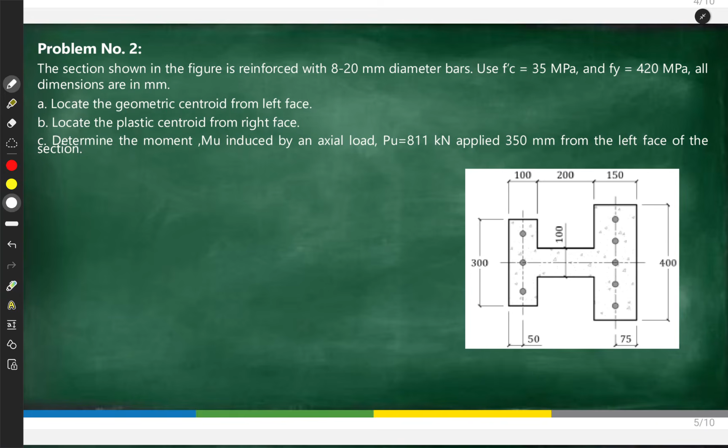We are still in the topic of plastic centroid for reinforced concrete columns. This time we have problem number 2. The section shown in the figure is reinforced with 8 pieces of 20mm diameter bars, using F'C 35 megapascal and Fy 420 megapascal, and all dimensions are in millimeters.

Next, locate the plastic centroid from the right face. Then, determine the moment induced by an axial load of 811 kilonewtons that is applied 350 millimeters from the left face of the section.

So first, what is being asked is the geometric centroid. Again, geometric centroid is just the centroid of the gross cross-sectional area of our column. That's what we're discussing.

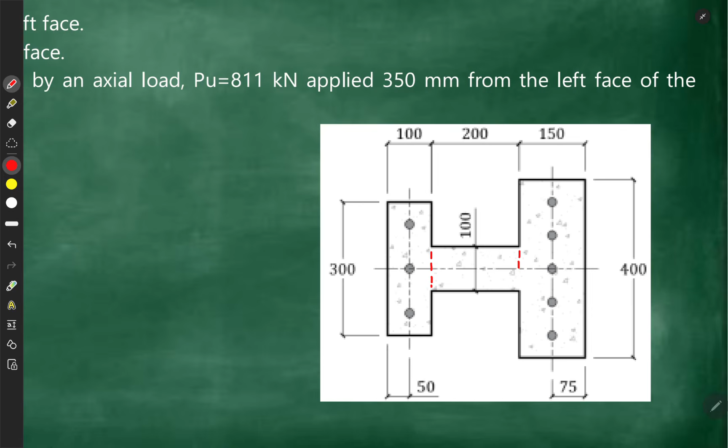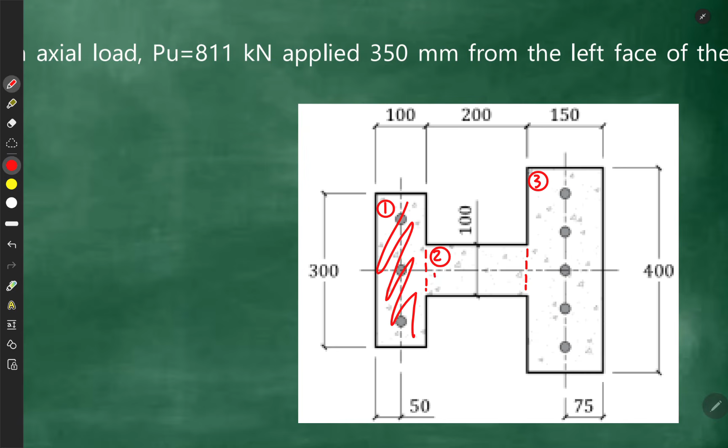So let's divide this first into simple figures. This is figure 1, this is figure 2, and this is figure 3. Figure 1 is all of this, and these are figure 2 and figure 3.

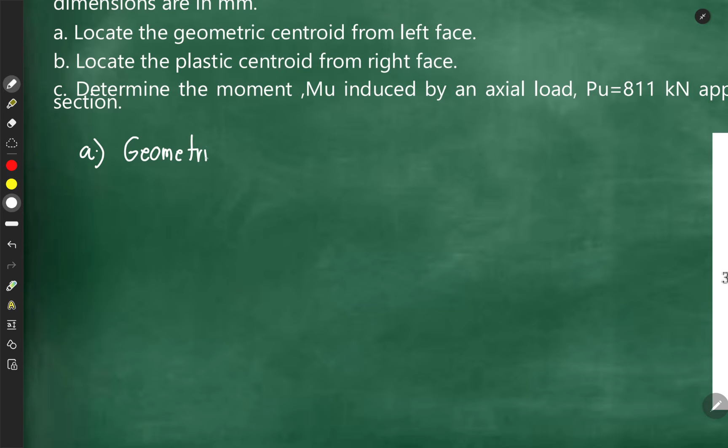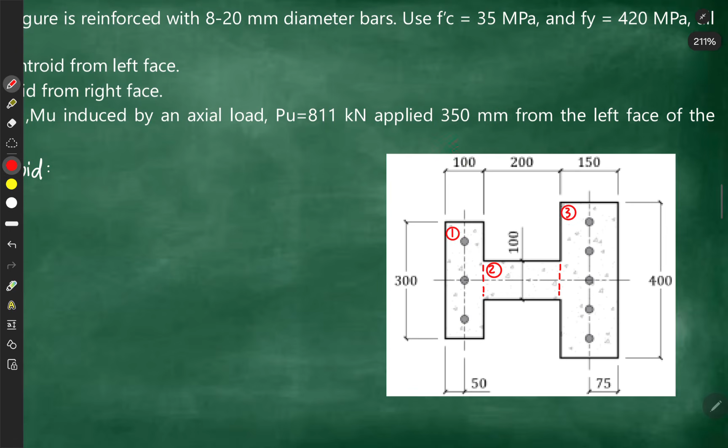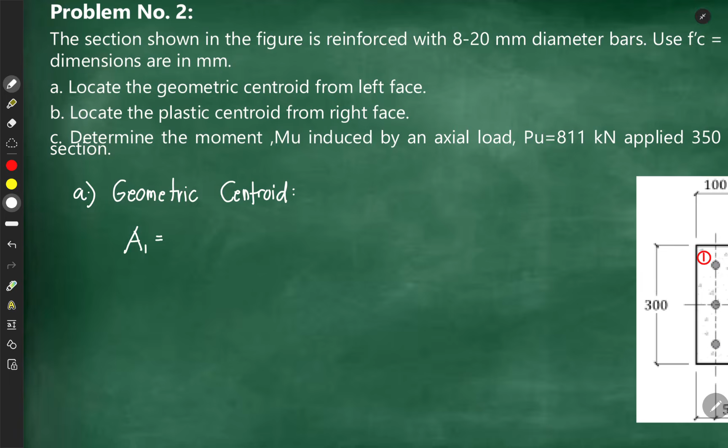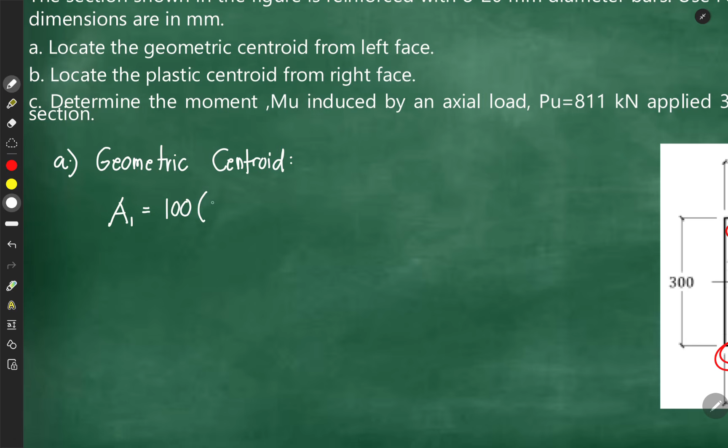So first, let's solve for our geometric centroid from the left face. Let's solve area 1 first. Area 1 has a base of 100, then a height of 300. So 100 multiplied by 300 is equivalent to 30,000 square millimeters.

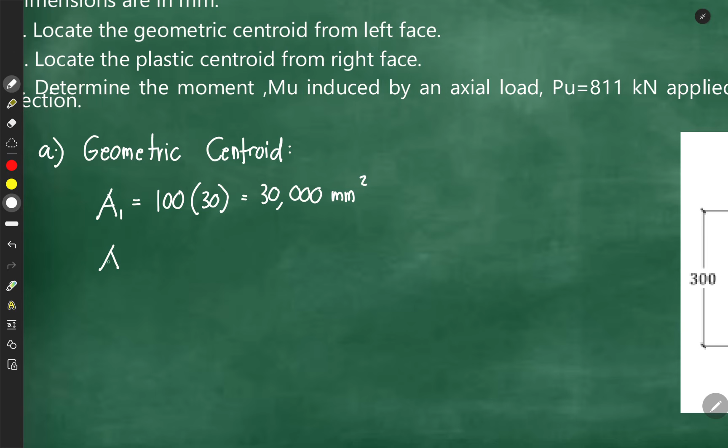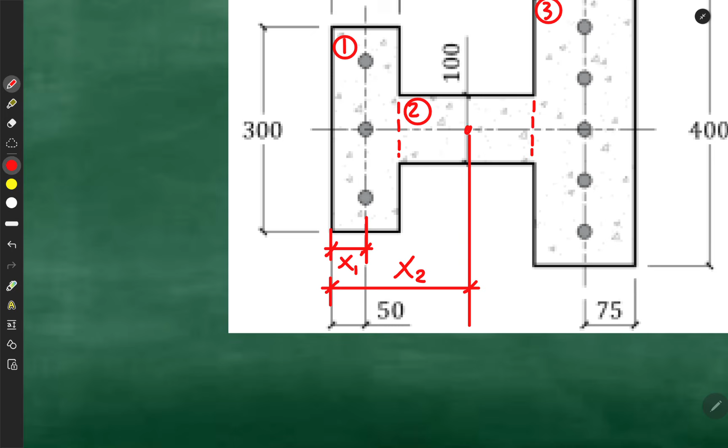For area 2, let's show the x1. So x1 is measured from here to here, the centroid of figure 1 from the left face. Then this is from here to here for x2, and this is from here to here for x3.

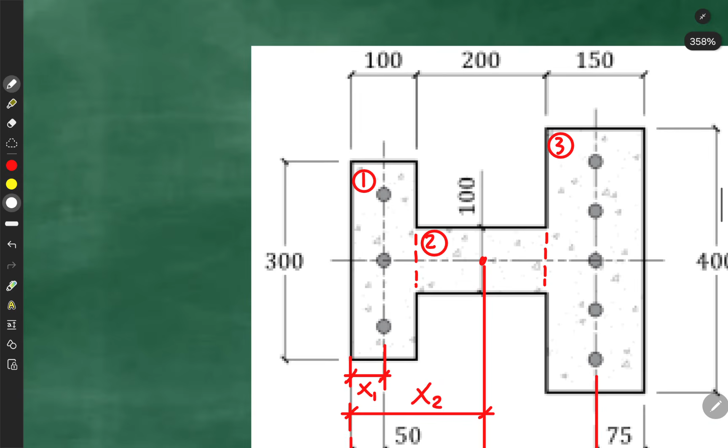So our x1 is just half of 100, so that is 50 mm.

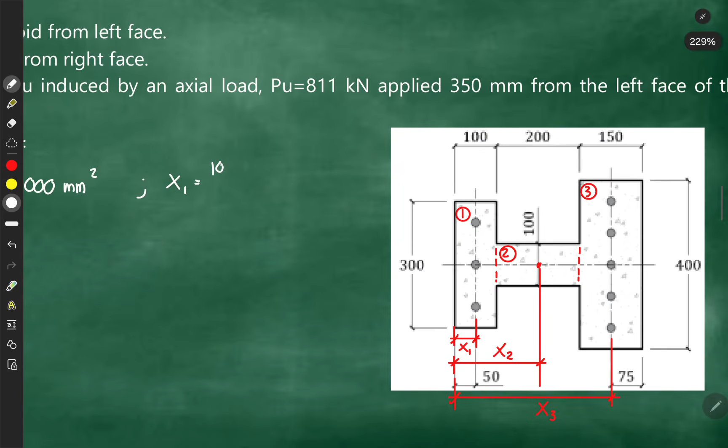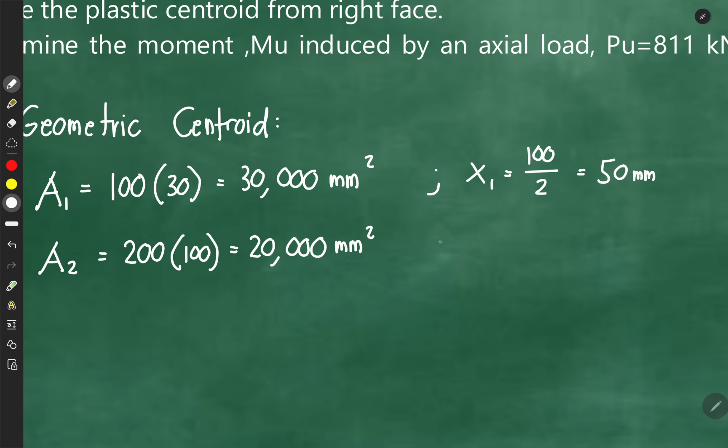Next, area 2 has a base of 200 and a height of 100, as shown. Base of 200 and height of 100 is equivalent to 20,000 square millimeters. And for our x2, the distance is 100 plus half of 200, or simply 200.

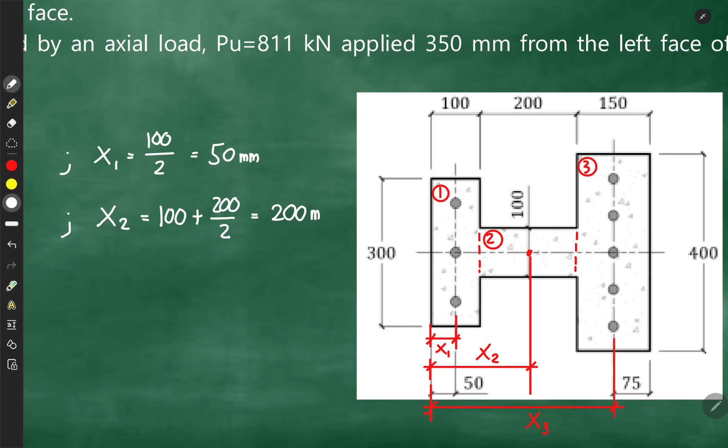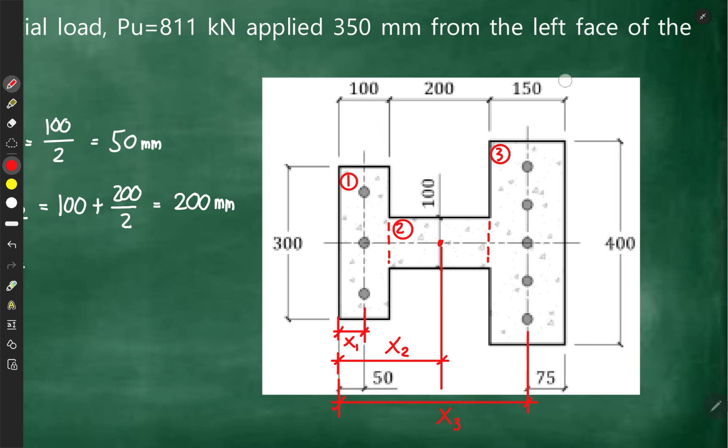And next, for area 3, it has a base of 150 and a height of 400, so this is equivalent to 60,000. So what is x3? X3 is simply, if we total this all, 100 plus 200 is 300, plus 150 is 450, minus 75. So 450 minus 75 is equivalent to 375 mm.

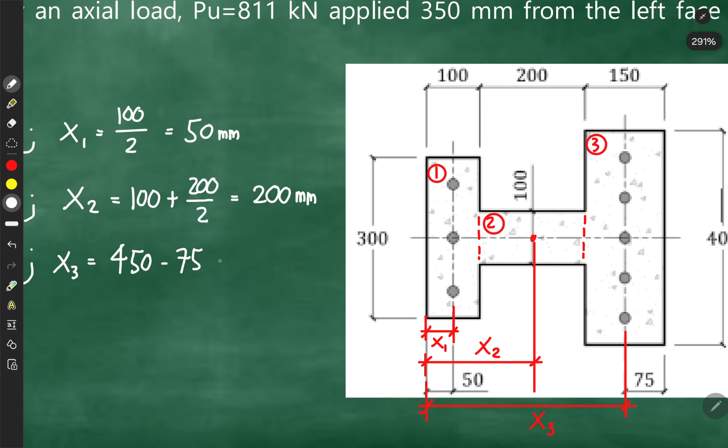Okay, so let's compute for the total area. Total area is equivalent to 110,000 square millimeters.

Okay, so let's solve now for our geometric centroid from the left face. Let's use Varignon's theorem. Total area multiplied by the x bar from the left face is equal to a1x1 plus a2x2 plus a3x3.

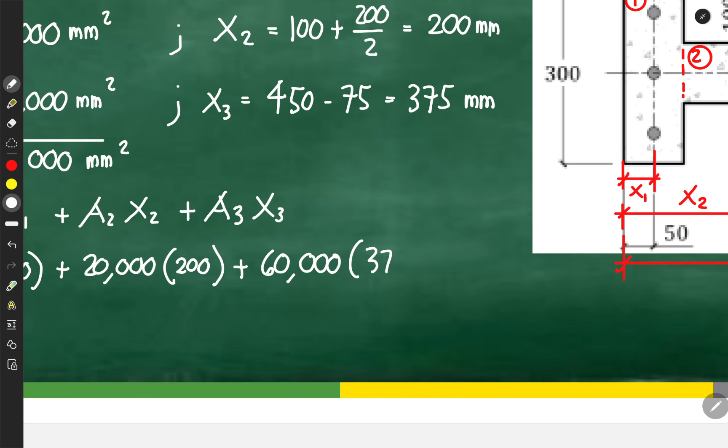So total area we have 110,000, x bar from the left face equals area 1, 30,000 multiplied by x1 which is 50, plus area 2, 20,000 times x2, 200, plus area 3, 60,000 times x3, 375. Therefore, our geometric centroid from the left face of our column will be 254.5455 mm. This is now our answer.

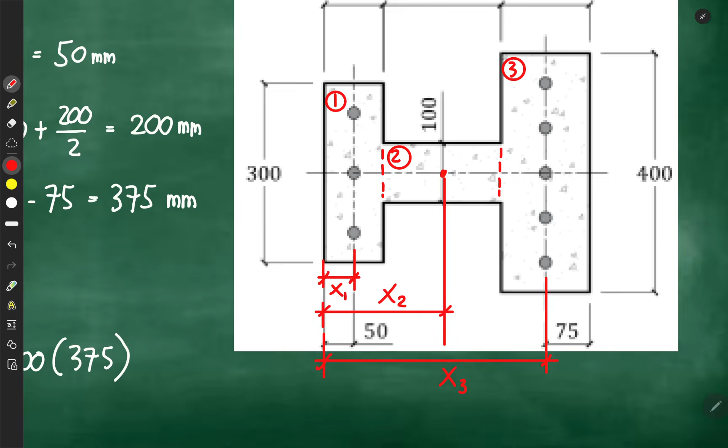For letter B, locate the plastic centroid from the right face. So from here now is our plastic centroid. First, for the concrete, I'll name this CC1, this is CC2, this is CC3. But for the steel, I can't use that since they're not evenly distributed, so I'll only consider C'(S1) and C'(S2). Let me place these.

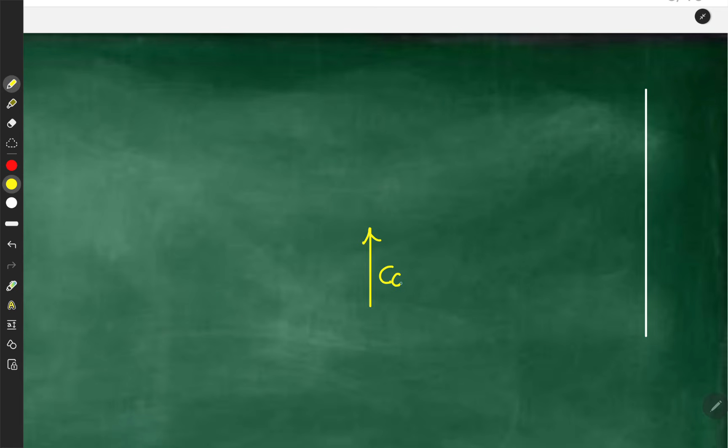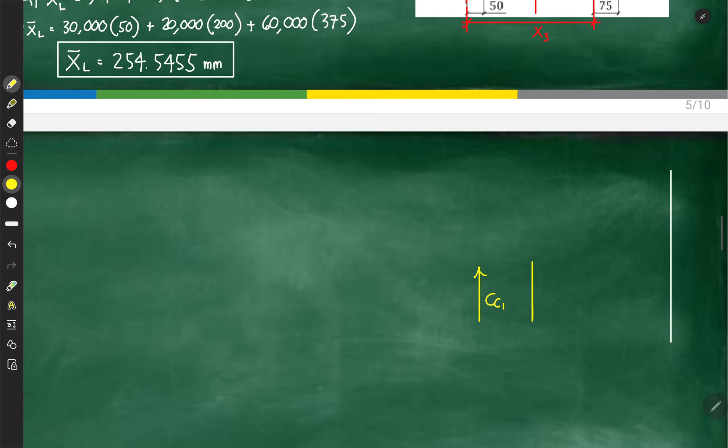First, from here at this face, we have CC1. So let's say it's here. This is CC1. Then next, this is our CC2. And next, this is our CC3.

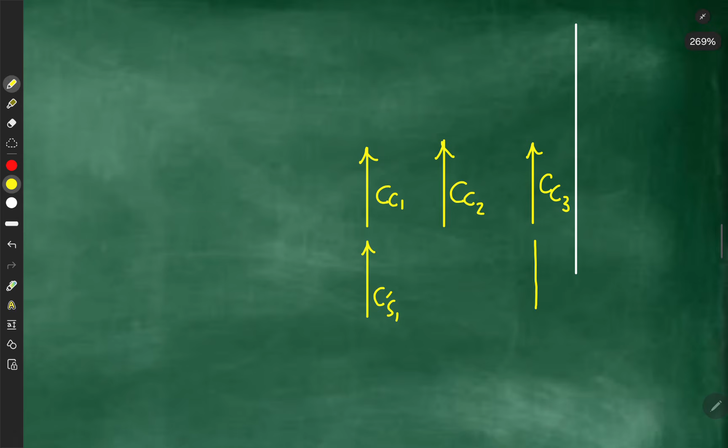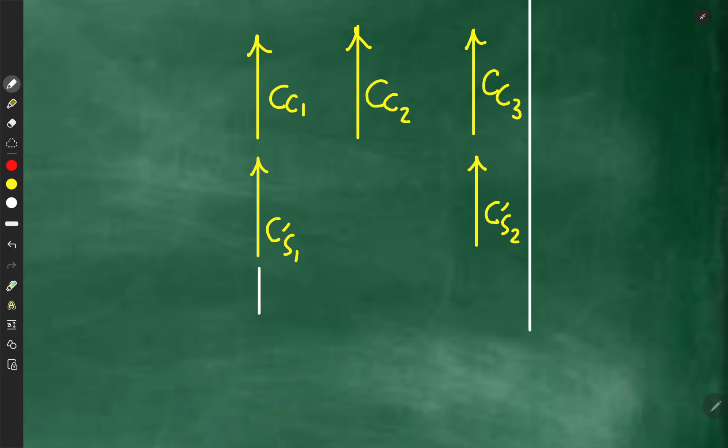So let's place their distances. For CC1, measuring from here to here, that's 450 minus half of 100. So 450 minus 50, that is 400.

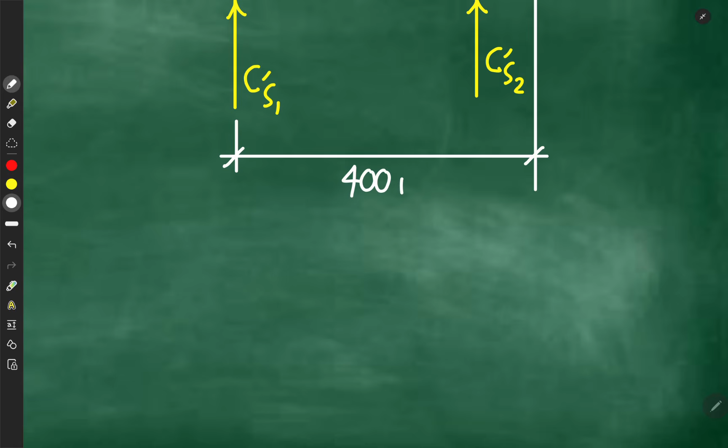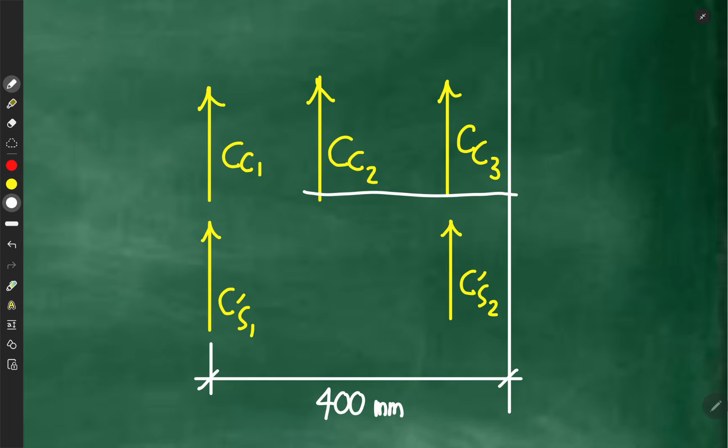Next, for CC2, we have 150 plus half of 200, so 250. This is 250 mm.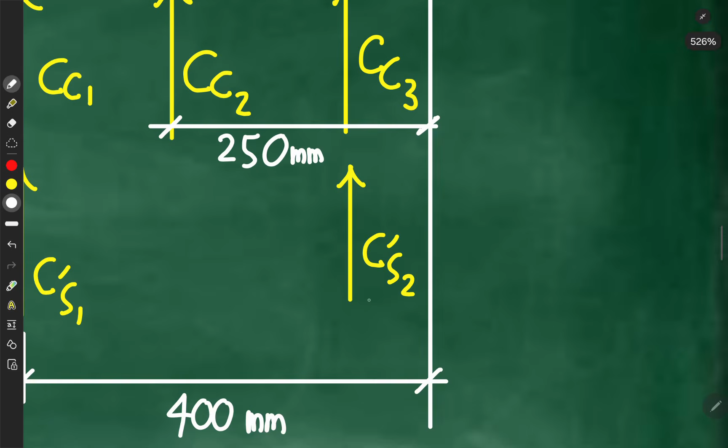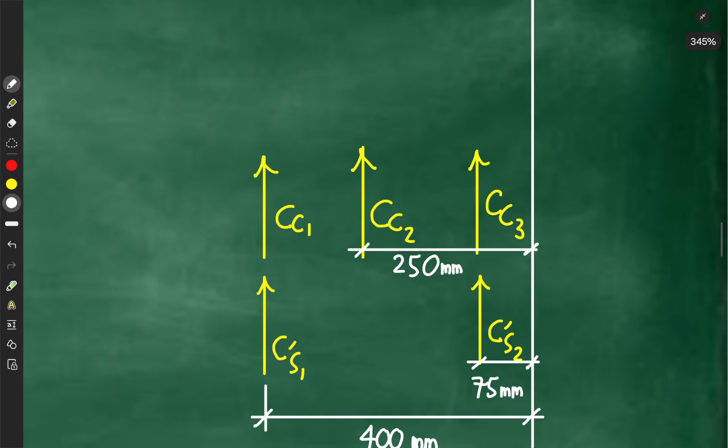And for our CC3 and C'(S2), that is just half of 150, which is 75. Okay, next, the forces here will counteract each other, which is our nominal load. So let's say our nominal load is located here.

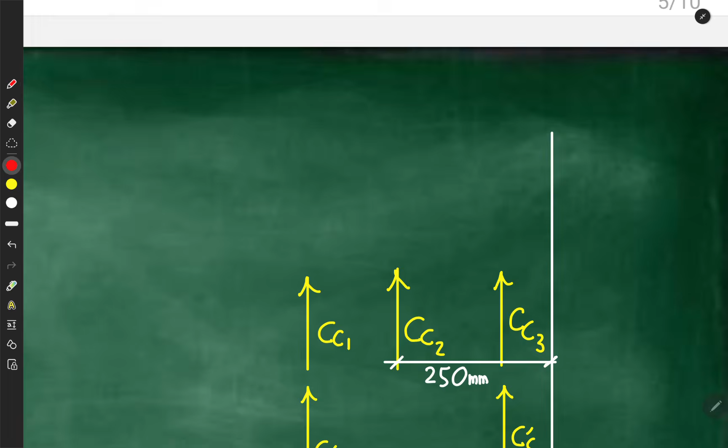This is our Pn. And this is our X bar from right face. The problem says plastic centroid from right face, so let's solve now for our plastic centroid from our right face.

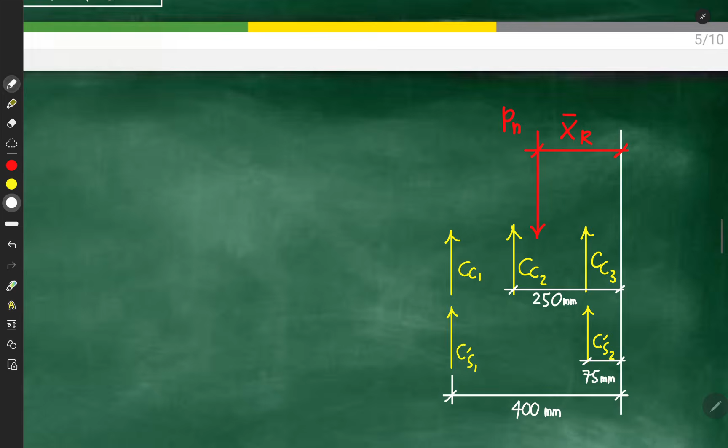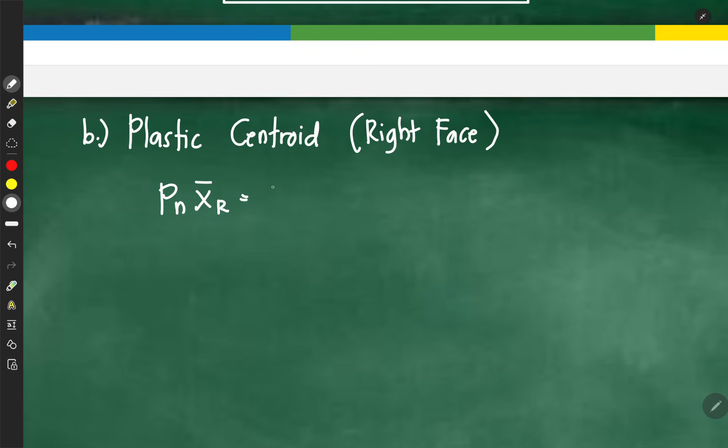For our letter B, we're going to solve our plastic centroid from our right face of the column. So to solve for plastic centroid, that is nominal X bar from right, which is equivalent to the summation of forces multiplied by X bar, or their individual distances from the right face of the column.

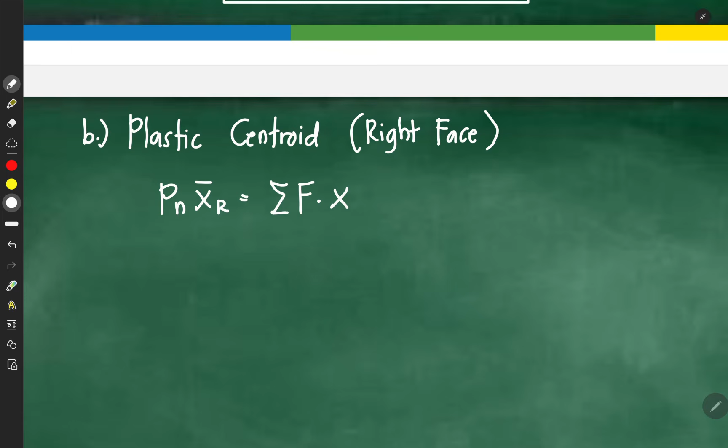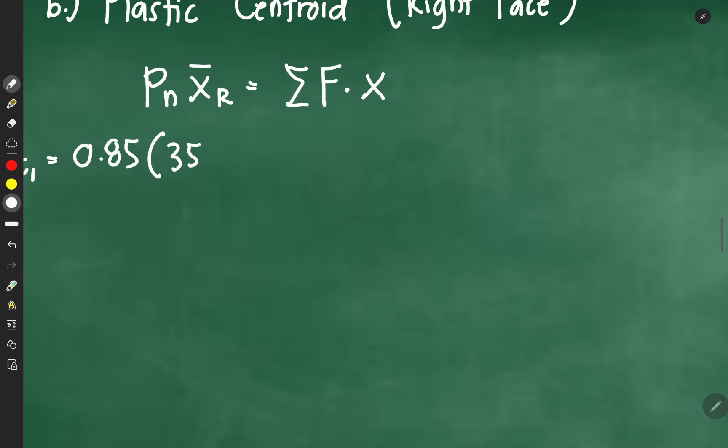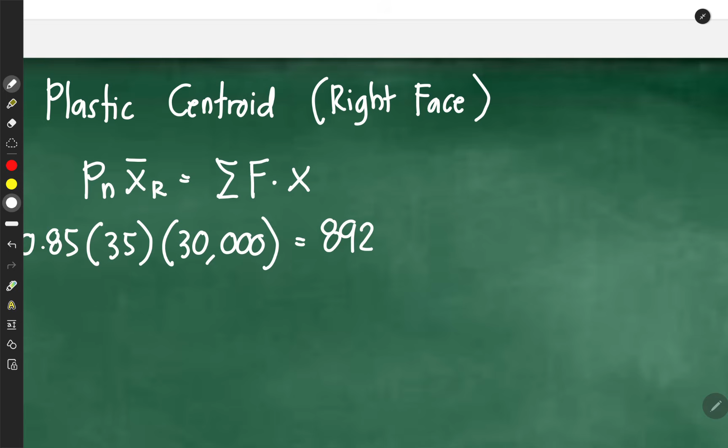So let's solve first for CC1. CC1 is equivalent to 0.85 times F prime C, 35, multiplied by area of CC1, which is A1, 30,000. So this is equivalent to 892,500 newtons.

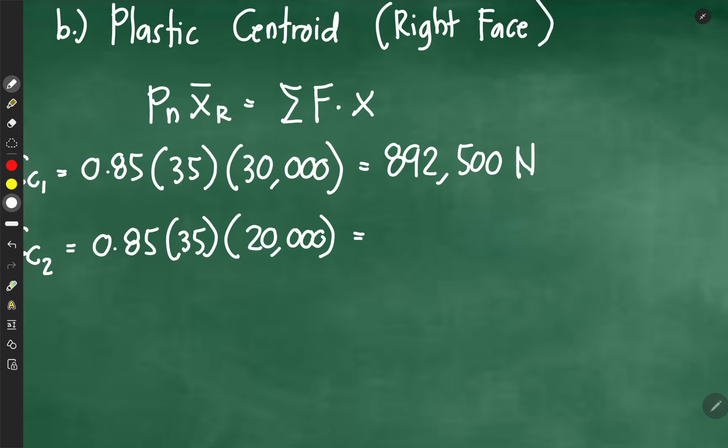Next, for our CC2: 0.85, F prime C, 35, area 2, 20,000. So this is equivalent to 595,000 newtons. And for our CC3,

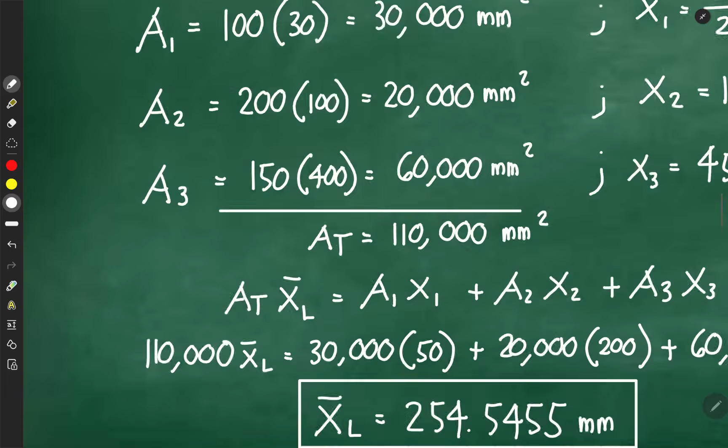0.85, F prime C, 35, times area 3, 60,000, is equal to 1,785,000 newtons.

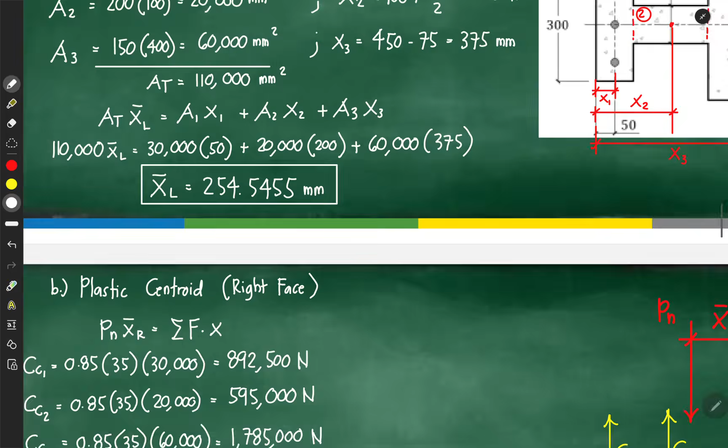Next, for our C prime S1, the problem didn't say if we should neglect or consider it, but we always consider the displaced area of our concrete due to the steel. So that is Fy minus 0.85 F prime C. For our C prime S1, Fy is 420 minus 0.85 F prime C,

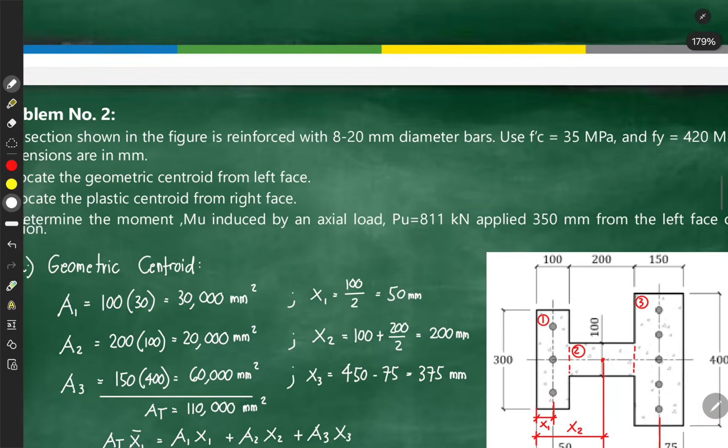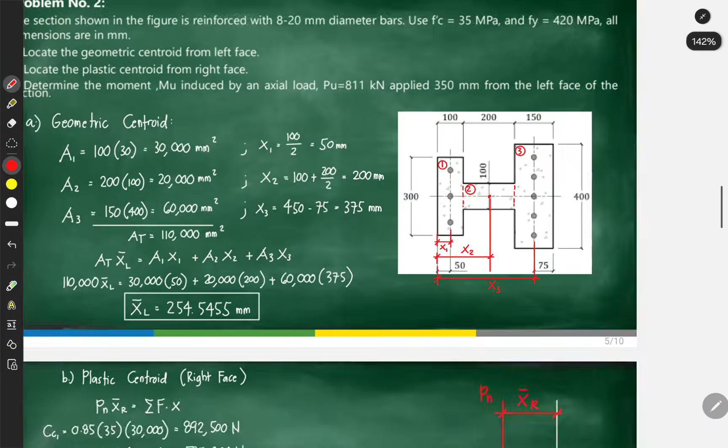35 times the area of the steel, so pi over 4 multiplied by the diameter of bar, 20 mm, and for C prime S1 we have a total of 3 steel bars. This is now equivalent to 117,075 pi newtons.

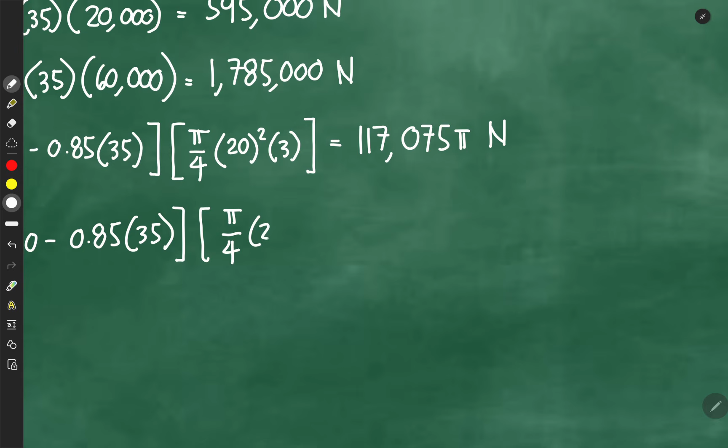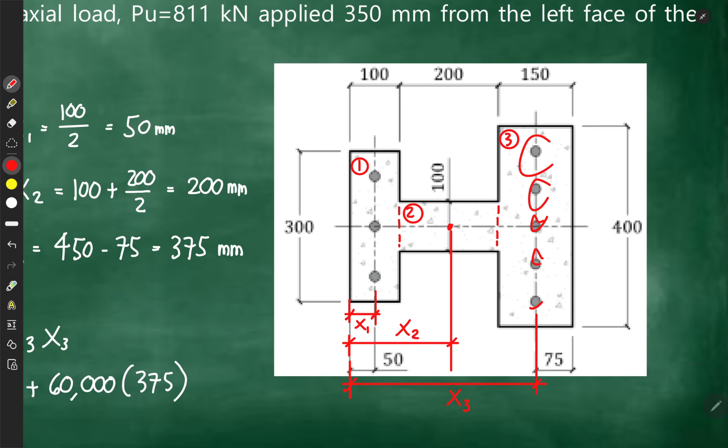And for our C prime S2, same thing: 420 minus 0.85, 35, then pi over 4, area of individual steel bar, times how many? We have a total of 1, 2, 3, 4, 5 reinforcing steel bars from C prime S2. So this is equivalent to 195,125 pi newtons. So these are all our forces.

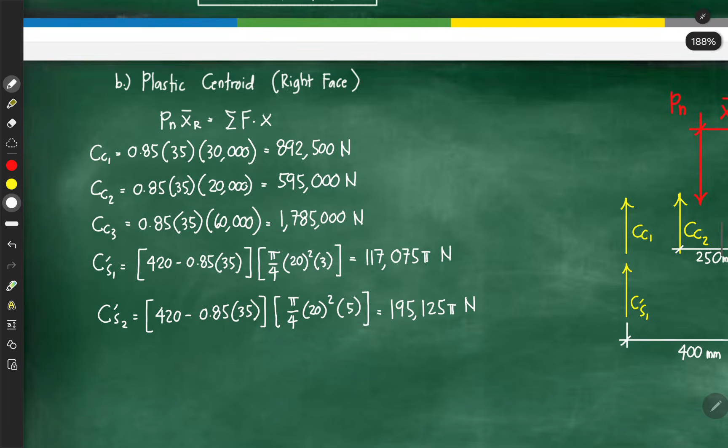Let's solve now for our nominal load. Just combine all this. So for our nominal load, this is equivalent to 4,253,305.226 newtons. Okay, so that's that.

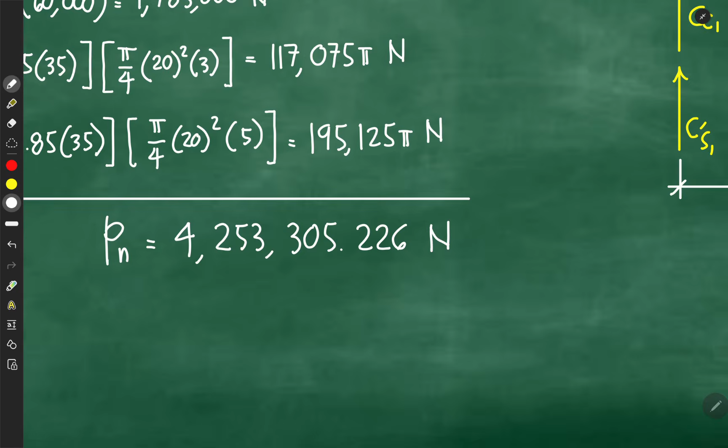So let's solve our plastic centroid from our right face of our column. I'll use this formula: substitute Pn, nominal load, we have 4,253,305.226 times X bar from right face is equal to area 1, 892,500 times its distance, 400.

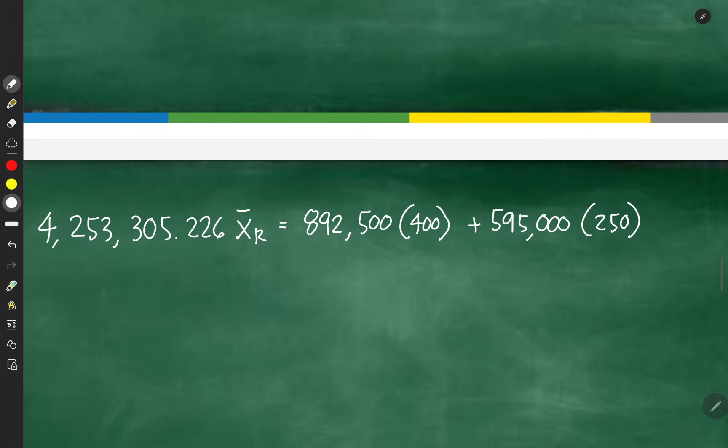Next, CC2: 595,000 multiplied by its moment arm, 250. Plus CC3: 1,785,000 times moment arm, that is 75, plus

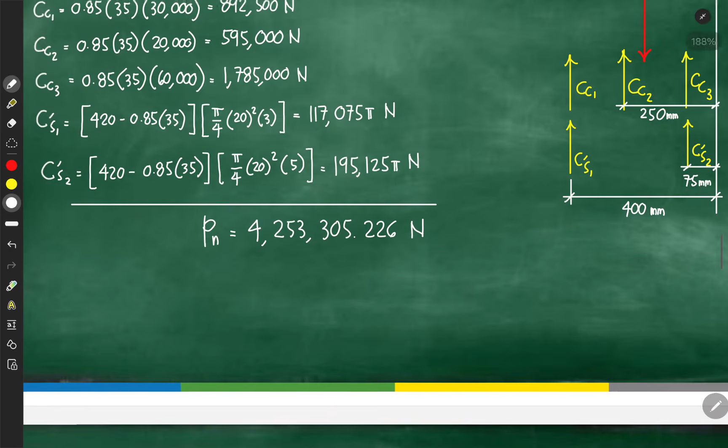C prime S1, 117,075 pi multiplied by its moment arm, 400 also. Then finally, C prime S2, 195,125 pi, multiplied by its moment arm, which is 75.

So therefore, our X bar, or plastic centroid from the right face of our column, is 195.7821 millimeters. This is now our answer for letter B.

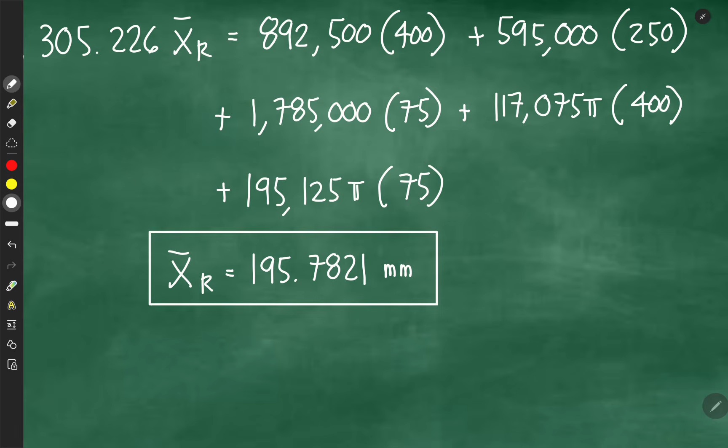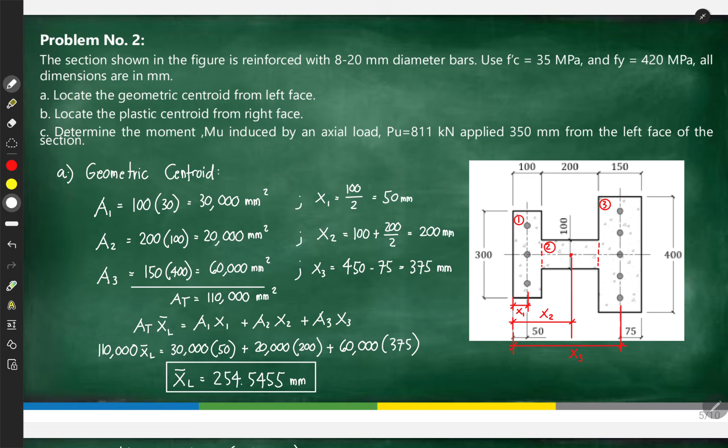For our letter C, determine the moment Mu induced by an axial load Pu, which is ultimate, 811 kilonewtons, applied 350 mm from the left face of the section. So here's this now for C. So we have Pu applied 350 from left face. So if this is 100, 200, this is 150, somewhere here is our Pu.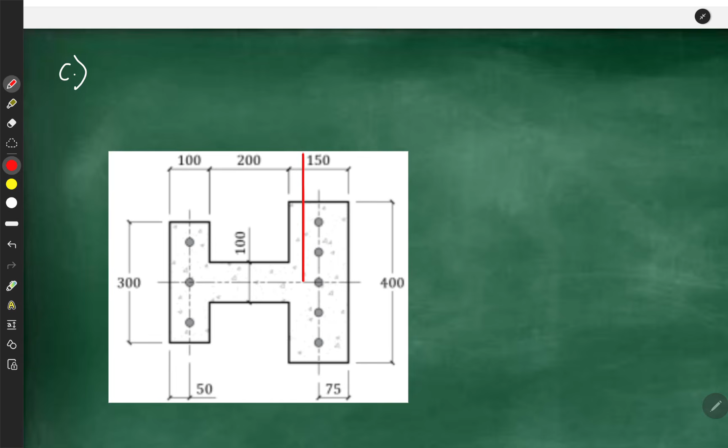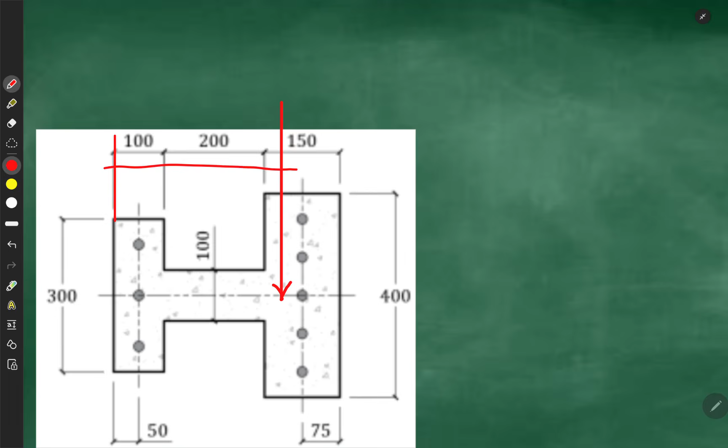This is our Pu, from here to here this is 350. This is our Pu, which is equivalent to 811 kilonewtons.

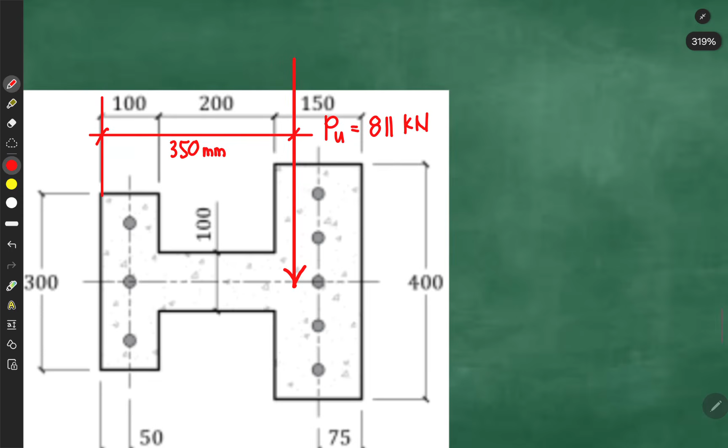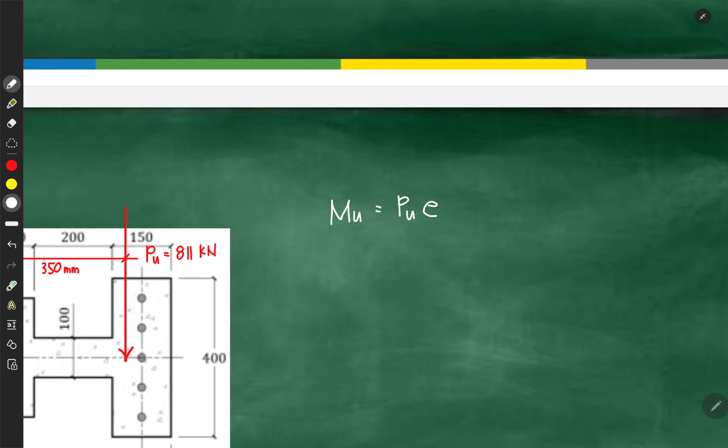Okay, so to solve for our Mu, that is simply Mu is equal to Pu multiplied by the eccentricity. So how do we get the eccentricity? We say the eccentricity is measured from the plastic centroid going to the load.

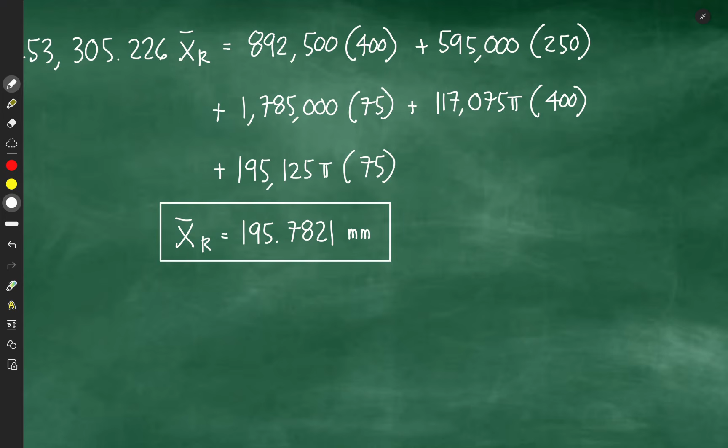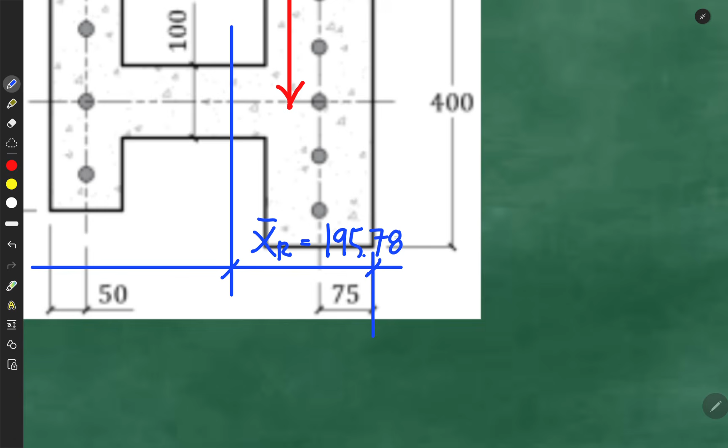Okay, so earlier, our plastic centroid from the right face was 195.7821, so let's say it's here. From here to here, this is 195. This is our XR earlier, plastic centroid, which is 195.7821 mm. So if this is 100 plus 200 plus 150, we have a total of 450.

So if that's 450, how much is left here from this point? So 450 minus this is equivalent to 254.2179 mm.

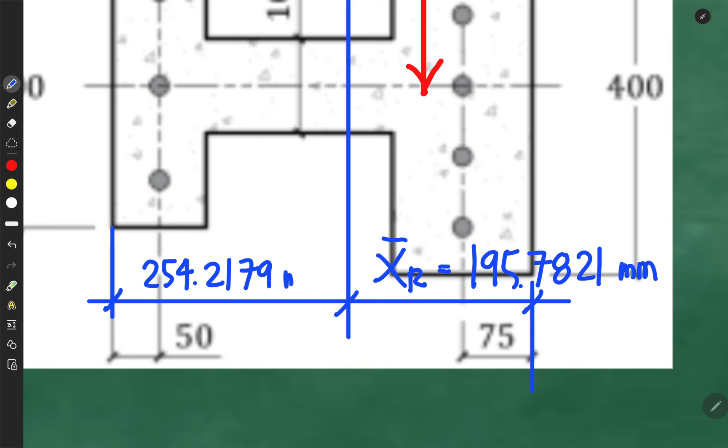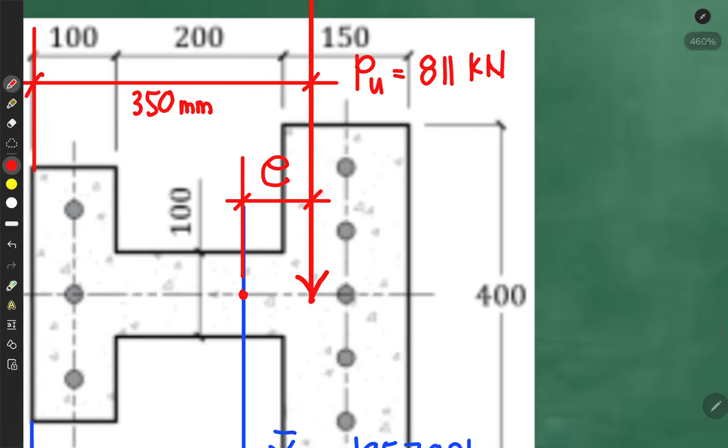Okay, so where now is the eccentricity we're referring to? If this is our plastic centroid, again the eccentricity is measured from our plastic centroid going to the load, which is here. So what's left here? If this is 350 and this is 254, simply, to solve for eccentricity, we can just say 350 minus this.

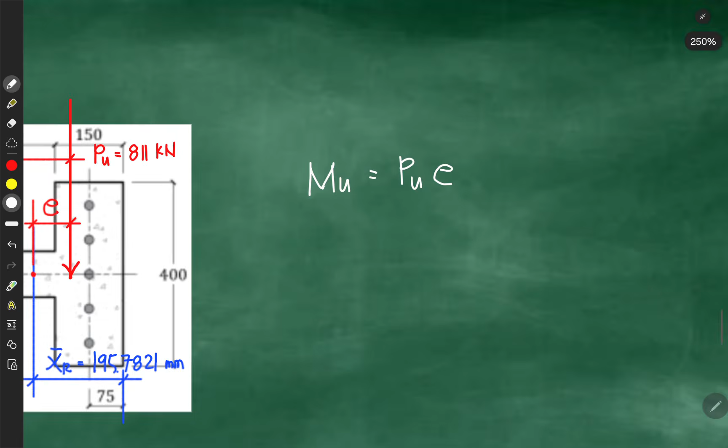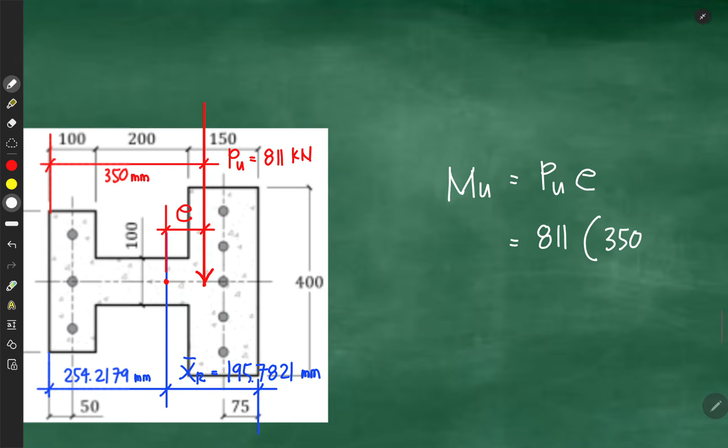Okay, so now we have a value for eccentricity, we can now solve for the value of our Mu. Let's substitute for our Pu, which is equivalent to 811, multiplied by the eccentricity, 350 minus 254.2179. So therefore, our Mu will now be equivalent to 77.6793 kilonewton meter.

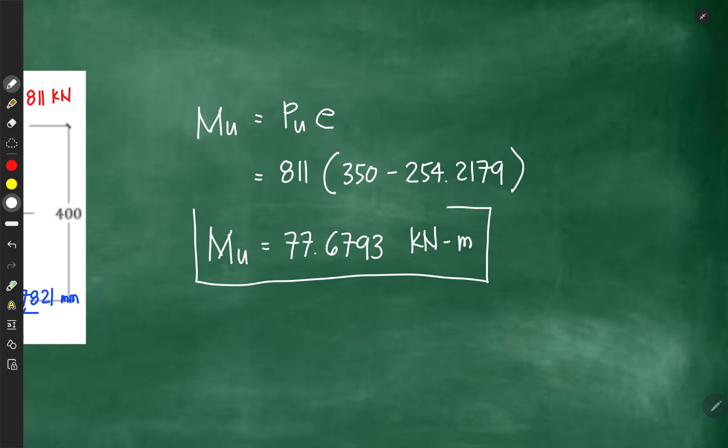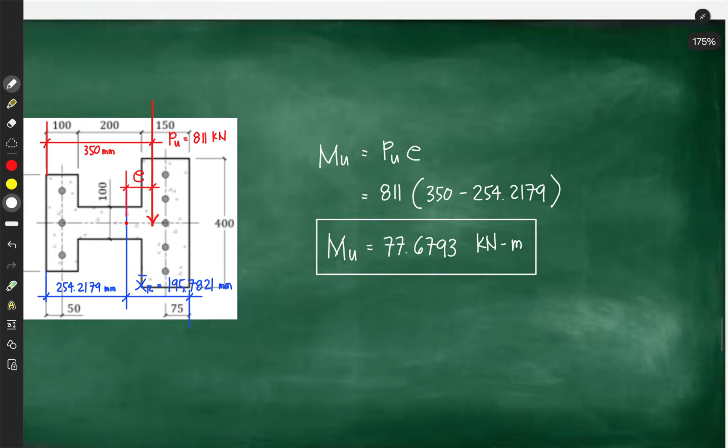Okay, take note, this was in millimeters. I divided by 1,000 to make that in meters. And this is now our answer for our Mu. This is how you solve for plastic centroid and geometric centroid, and for Mu, for our topic on plastic centroid for reinforced concrete design.